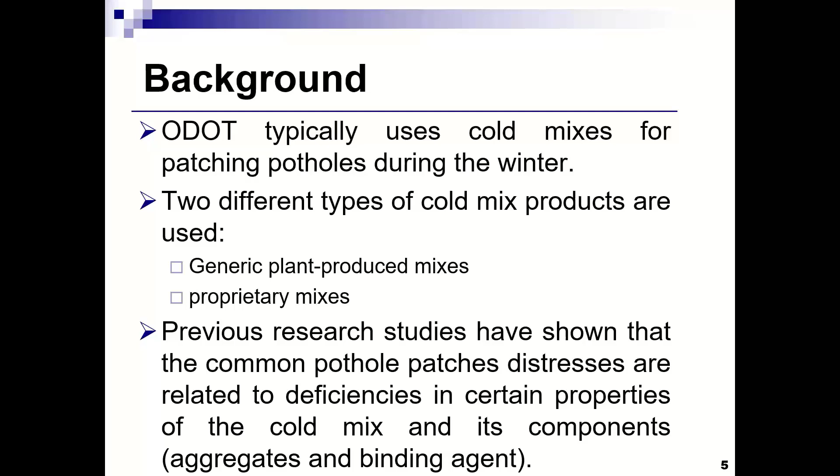There have been several research studies indicating that the performance of patches and their longevity is related to the properties of the cold mix. However, these studies did not really identify what properties can be used to examine the performance of those materials and ensure the longevity and performance of installed patches.

ODOT, and I would say the majority of transportation agencies, whether DOTs or local public agencies, currently do not have a standard specification for cold mix. Basically, they do not have a measure to ensure the quality of cold mix, whether it is generic plant-produced cold mix, or proprietary and included in ODOT's approved list of materials.

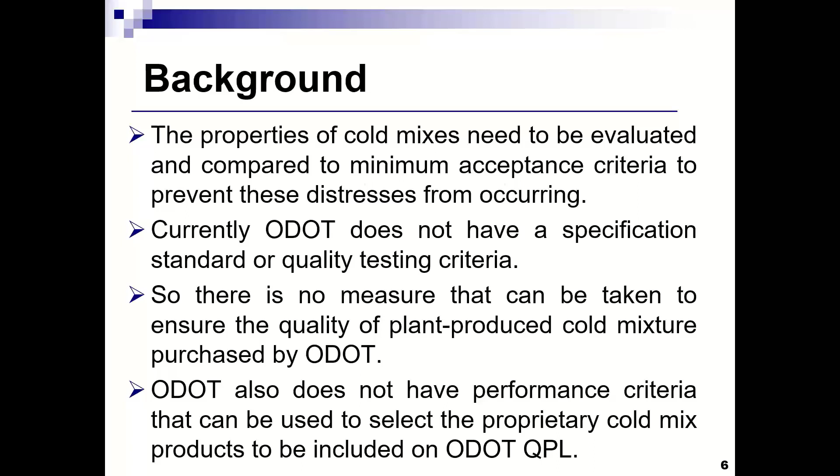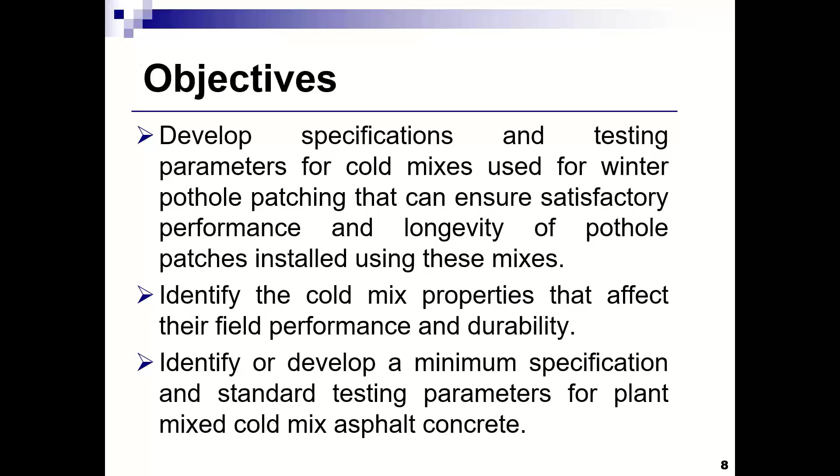As a result, there was a need to develop specifications to ensure the performance of patches. So the objectives—starting with the ultimate goal of this project—were really to develop specifications for cold mix specifically used for winter pothole patching, to ensure satisfactory performance and longevity of patches installed using those mixes. To achieve this goal, we had two main objectives: identifying the properties that affect performance and durability, and identifying the threshold limits for those properties that can be used as acceptance criteria in the specification.

The project had multiple tasks. We started with identifying the current state of practice, identifying the cold mix materials used by ODOT, and determining ODOT's experience with those materials. We also did a literature review as well as a national survey to determine if there was any standard specification used for cold mix. We found that, at least at the time this survey was conducted, there was no standard specification for cold mix.

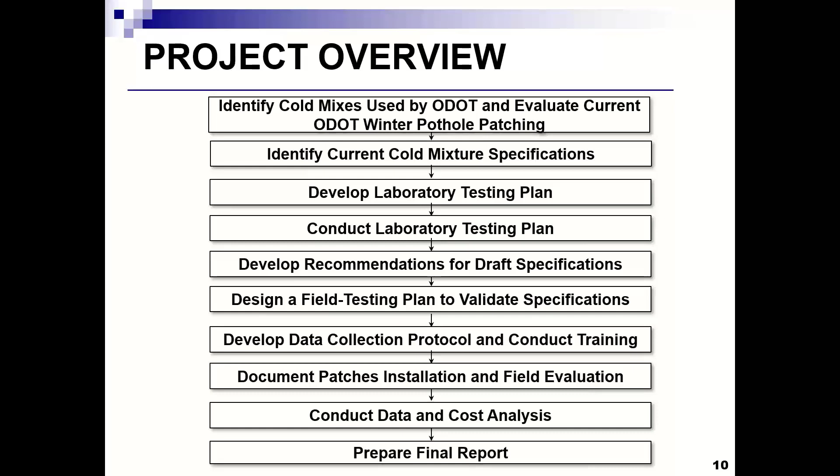Based on that, we developed a laboratory testing program, which I'll talk about in a moment. That led to developing a draft specification, which was then validated through a field testing program. As I said, we had two phases. In phase one, the focus was on lab testing, where we collected different cold mix materials and their components—the binding agent and the aggregate.

We basically developed a mixing criteria and aging and curing protocol to simulate what we have in the field. Then we did a comprehensive lab testing program to determine the properties able to detect the effects of the binder and aggregate. We also had a previous study using cold mix materials that helped us identify the limits needed to be set based on our lab testing results.

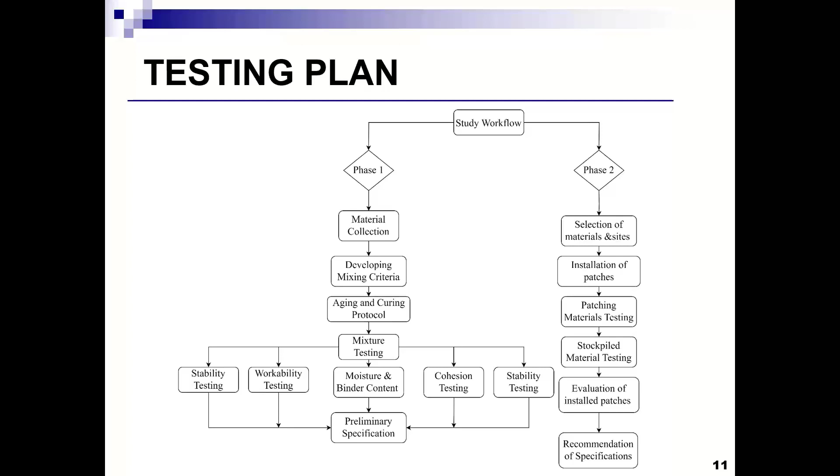In phase two, we used different cold mix materials, both generic and proprietary, as well as bulk and bagged. We used them to install patches in different locations within Ohio, focusing on different climates. We selected sites in the Northeast as well as the Southwest, and based on that, we finalized our recommendation and specification.

So phase one was the laboratory testing program. In phase one, we selected 8 different aggregates - 5 limestone and 3 gravel. All of those aggregate materials had been used in producing cold mix, and that's one of the reasons why we selected them.

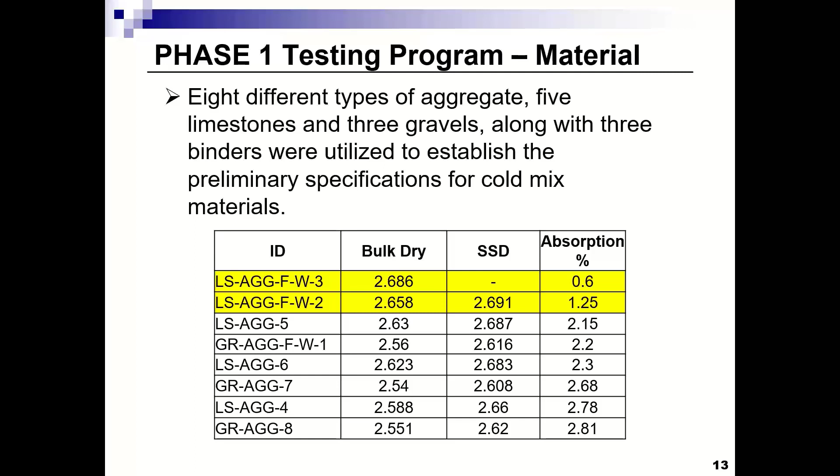We tried to make sure we had materials with different properties, specifically low and high absorption. We also looked at the percentage of fines, or passing 200, and you can see we have a range here.

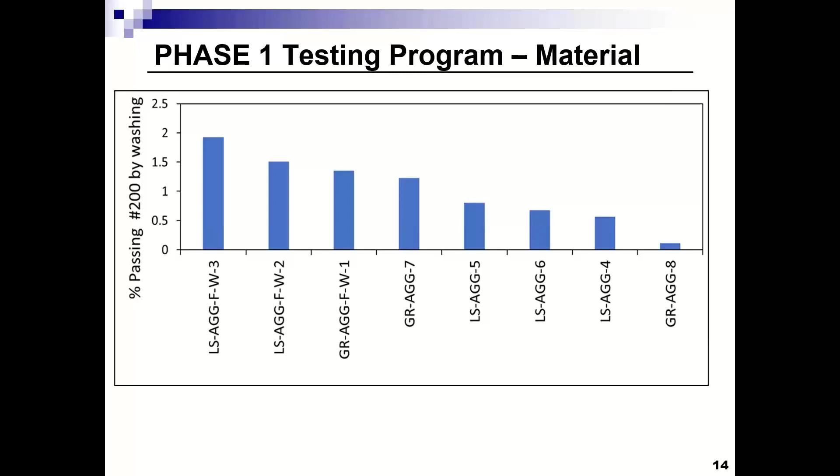We selected 3 different binding agents. Those binding agents are used in producing cold mix in Ohio as well as outside Ohio, and we conducted different tests to characterize the properties of the binding agent.

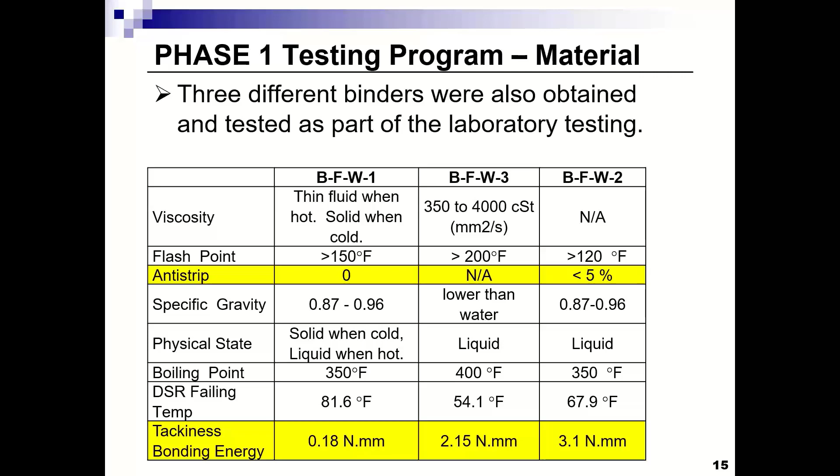One of the things we looked into was conducting the dynamic shear test, as well as a new test that we adopted - the tackiness bonding energy test - which helps us determine the adhesive properties of the binder.

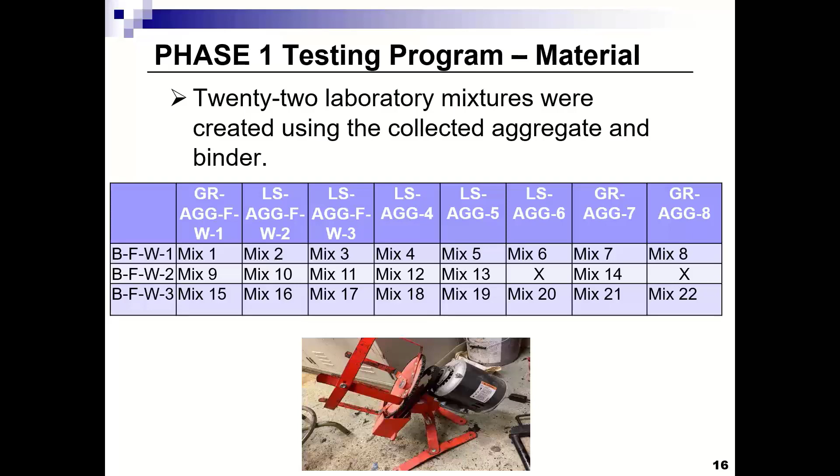We did different aggregate-binder combinations. We had 8 aggregates and 3 binders. I would say we tried to have a full factorial, but we were short by 2 mixes - we had an overall 22 mixes that were prepared and tested.

The tests we have looked at properties we thought would impact performance, starting with cohesion. We know the cohesion of the mix will affect that, so we had a torque test that was actually developed as part of another ODOT project.

We also looked into the stability of the material - the Ideal CT as well as the Hamburg loaded wheel test. The stability tells us more about strength properties as well as ductility, so both are within that.

And then we have the moisture susceptibility as well as the stripping potential there, and we used the boiling test for that.

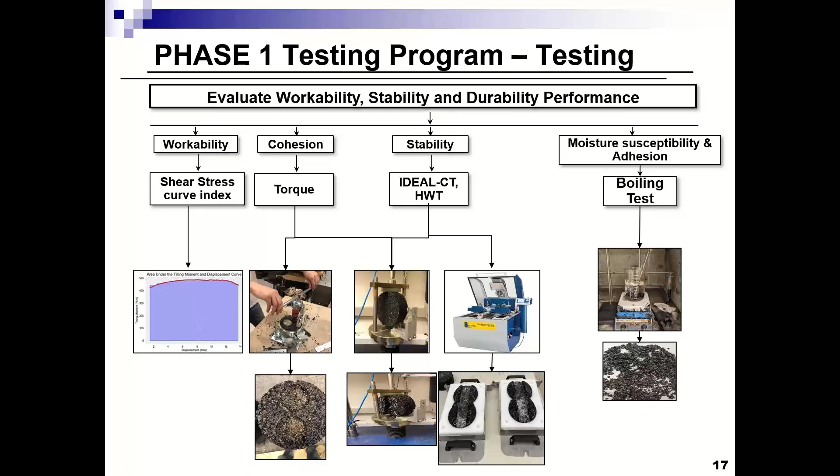We also looked into workability, and we evaluated different tests. The test we found to be related to the observed workability was really looking at the curve - the tilting moment curve coming from the Superpave gyratory. So basically compacting a Superpave gyratory at low temperature and looking at the area under the tilting moment displacement curve, which is shown here. This area, we are calling it the shear stress curve index.

For this, because we're looking at the intermediate to low temperature, this is important, and as we will talk about it in a moment, it can also be related to the rutting potential of the cold mix. So this ITS - the higher the number, the better the strength.

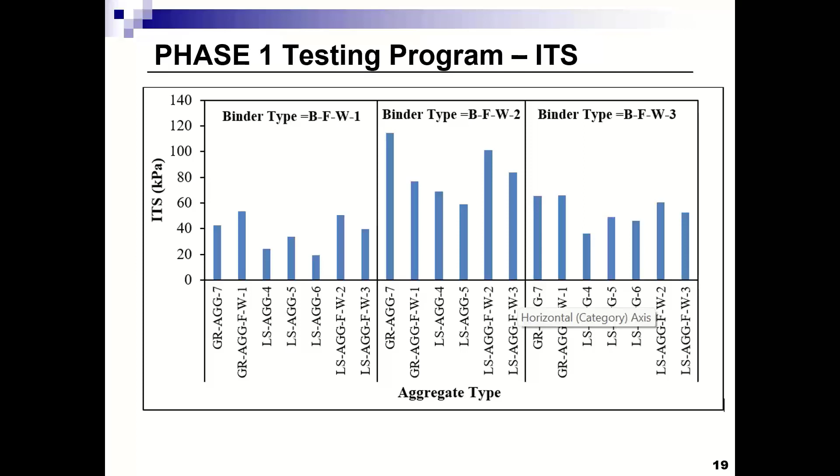The other parameter we looked into was the CTI, the cracking tolerance index. It's a parameter currently used to evaluate hot mix asphalt, and it tells us about the cracking potential - I would say the ductility, to a certain degree, of your material and its tolerance to cracking.

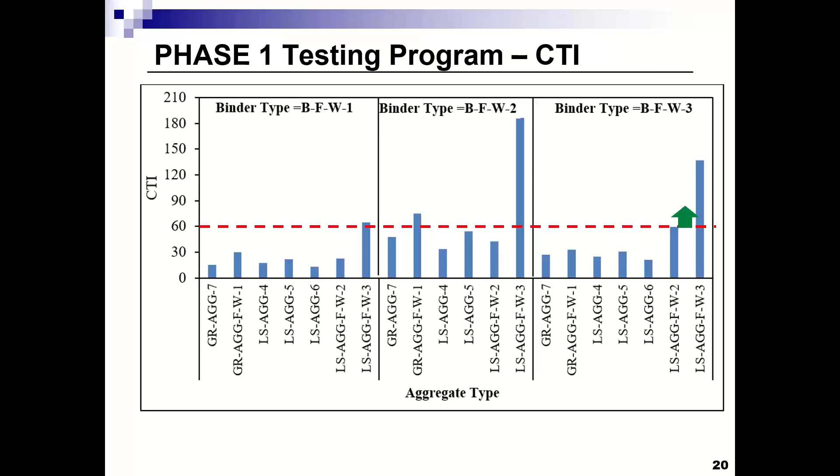One important thing that I would say, that again this was later on verified, is that the CTI seems to be affected by both the aggregate, and it also takes into consideration the binder. So it is a parameter that was able to differentiate between, or detect the effects of, changing the binder type.

The other parameter or test that we had is the boiling test, and the main thing is the percentage of material showing stripping. I would say it's a very easy test, but we found that the stripping parameter seems to be also able to distinguish the effect of the binder and the aggregate on the performance.

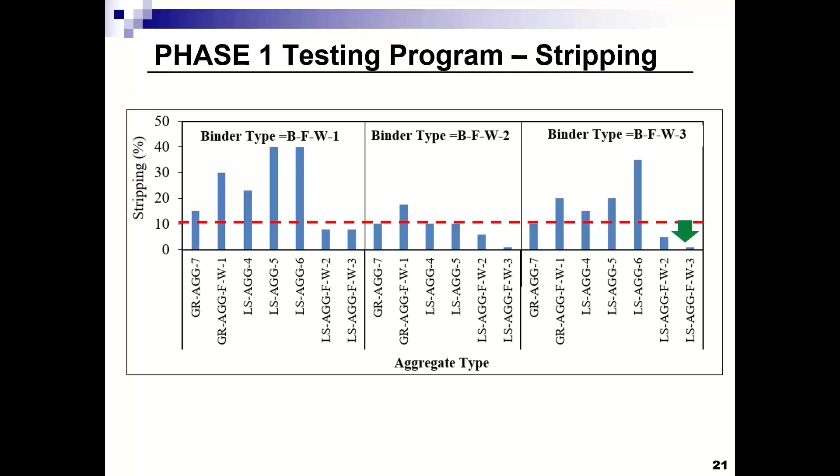Again, based on field data, what we observed is anything that is less than 10%, which is also according to the standard for this test, the boiling test, the 10% is the maximum allowed stripping. So we used that number based on the field data as well, and anything below 10% is acceptable or has acceptable performance.

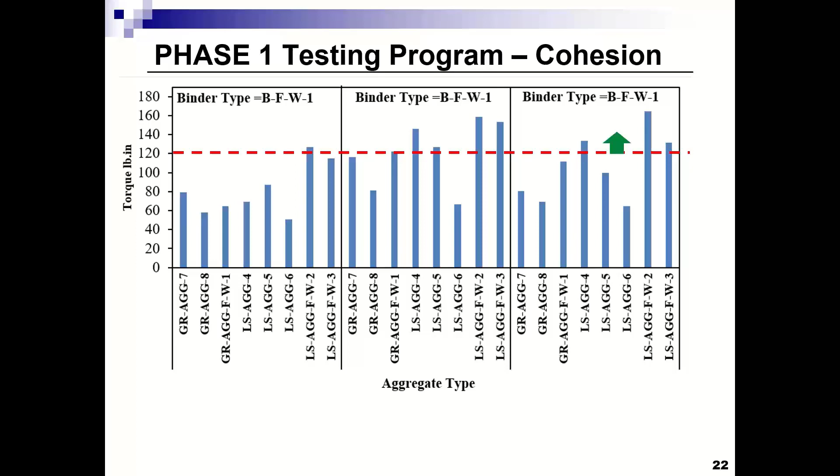...we have set 120 torque pound-inches basically as the minimum, so anything above that would be acceptable. We changed that later on, but this is basically based on the lab testing.

The other important thing was the rutting, which is correlated really with the dishing. Dishing can be a big problem for potholes. So you can have a material that has good cohesion, good durability, but it does not have enough strength, and as a result you will have dishing in the patch.

So based on what we have seen, we looked at materials that have shown, based on field data, high dishing, and we tried to look at the parameters - what is the minimum number of wheel passes that will enable us to ensure that we will not have a dishing? The number was around 2,500.

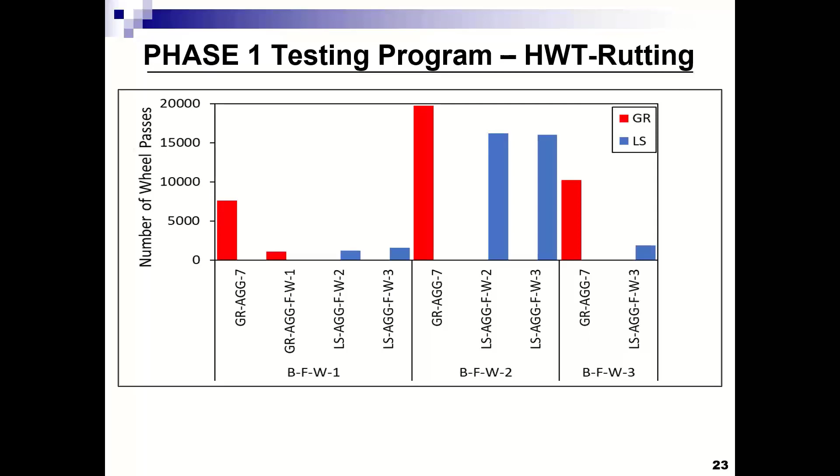One thing that we noticed is that the Hamburg loaded wheel is a test that might not be readily available at the current time with a lot of contractors, as compared, for example, to the IDT. So what we have done is looked at the correlation.

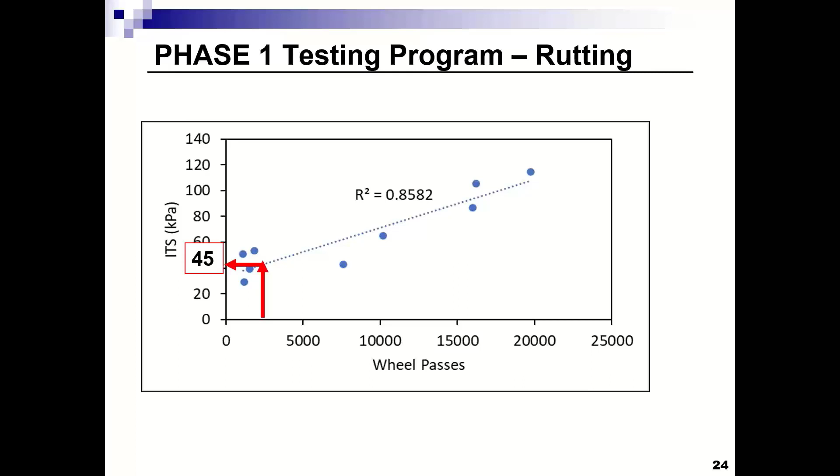This is the ITS done at room temperature, and the Hamburg loaded wheel in this study was conducted at room temperature because we are testing cold mix materials. We found a very good correlation, and from there we found that the 2,500 is equivalent to an ITS of 45 kPa, and this is what we selected as the minimum criteria to ensure that rutting will not happen.

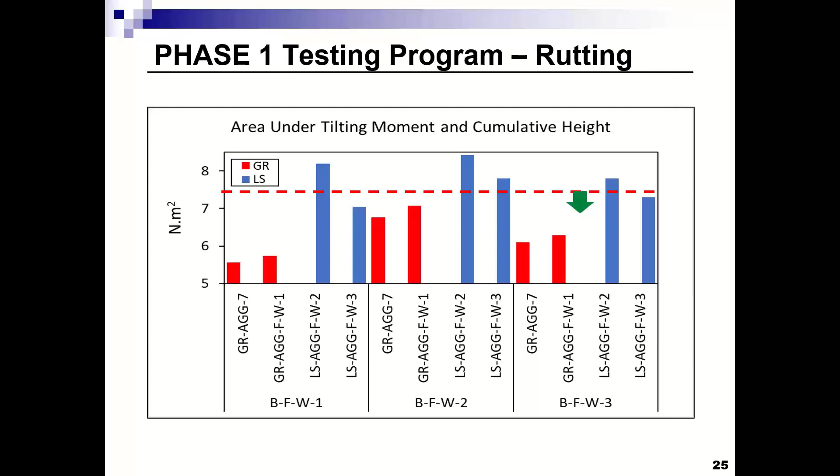The workability, we looked at the material and how workable it is. There was one material that was hard to compact and, based on observation, also hard to work with. Based on what we found, any material that has a shear index lower than 7.5 should have acceptable workability and should be workable in the field.

Also lab testing, as I will be talking about in a moment. So we did 231 patches. We did the installation of the pothole patches in different sites in northeast and southwest Ohio.

The patching itself was done by ODOT, Lorain and Hamilton County, in District 3 and District 8 respectively. You can see that we used 12 different materials, as shown there.

We looked into having a proprietary material as well as a generic, both bagged and bulk. We tried to have a minimum of at least 5 patches, but in the majority had at least 10 patches so that we are able to have conclusive results.

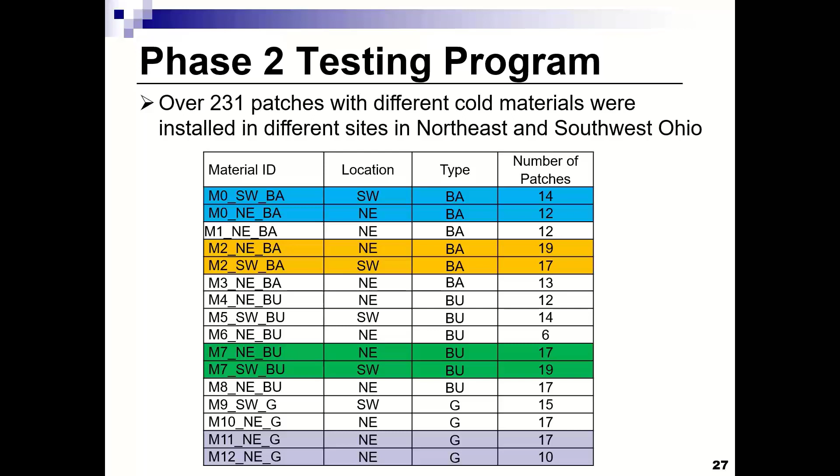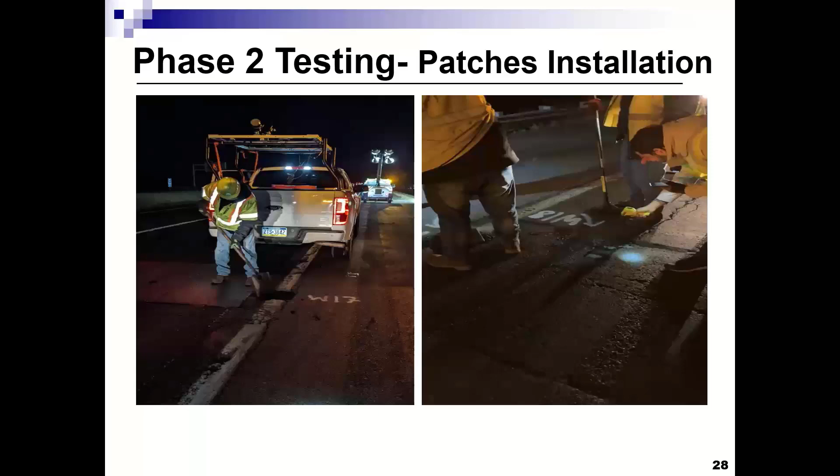Again, most of the work, because it was on an interstate, we basically had to do it during the night. We used a system that was developed to take initial pictures and location of each patch, and each patch was labeled.

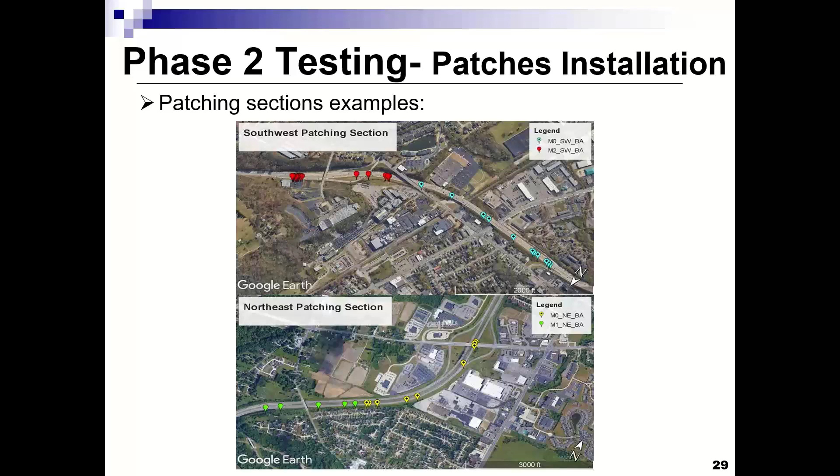This is based on that system, which enabled us to take pictures at high resolution and high frequency while driving at highway speeds. It enabled us to take images of the patches that are georeferenced, so we're able to get the exact location. We had a high accuracy GPS in there.

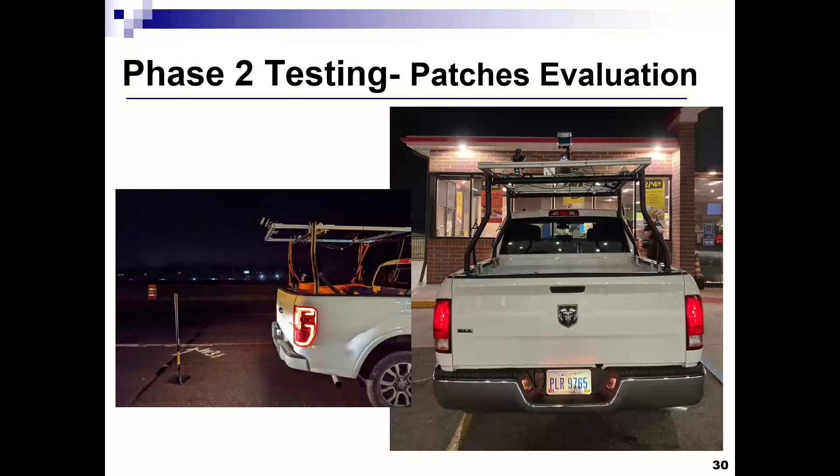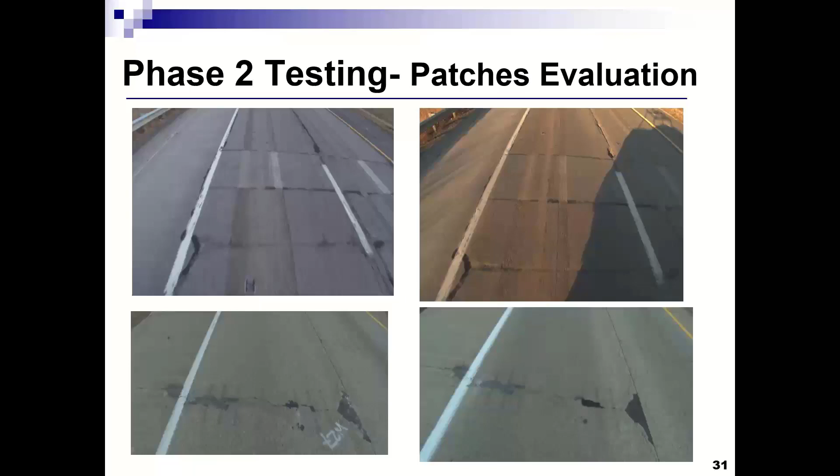This is a picture of the system mounted on the pickup truck. Those are images taken before and after. What we've done is take images directly after installation, then did an evaluation, basically taking images of those patches the first week, first month, second month, and then every 2 months for up to 1 year.

One of the things we did was collect samples of the materials used in the patching. We obtained those materials and tested them. For one of the materials, we looked at the material properties with time by sampling the material after 4 months and 8 months, and that material was also tested.

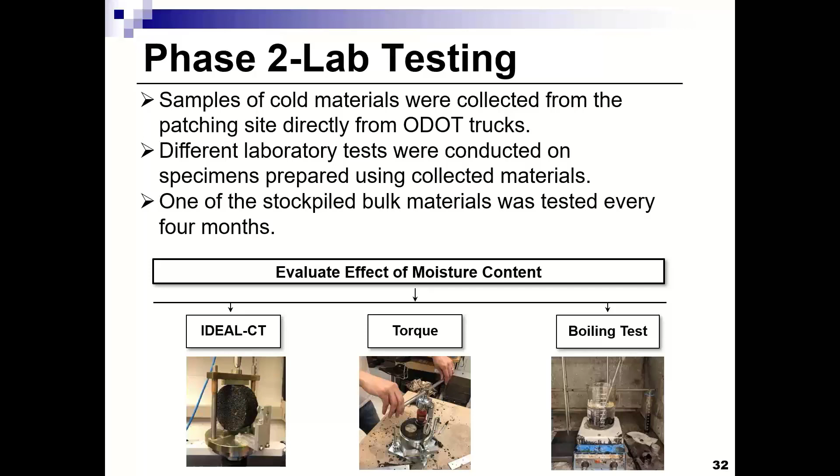The main tests we conducted are performance related, which is the ideal CT torque as well as the boiling test. Here I'm showing the ITS, and one thing we've seen is that in general the materials used in this study had acceptable criteria, more than 45 ITS. Some materials had a very high strength, and that high strength might not necessarily indicate better performance - it means it's a stiffer material that can resist dishing more.

Within the CTI, we had materials that did not perform well. One material that performed poorly, which we'll see later, is M12, an aged material. That aged material seems to have failed, not meeting the criteria of 60 that we have.

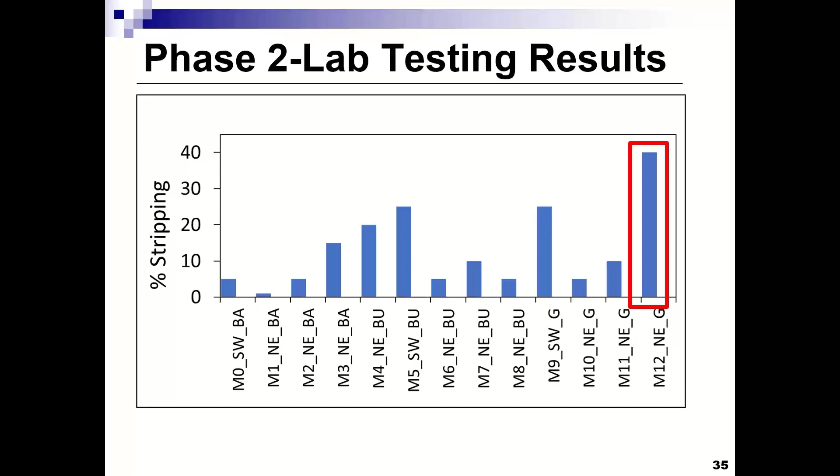The stripping is one of those parameters that was really a good indicator of performance. That material that failed - let's focus on that material, because the other materials actually performed generally well, at least within the evaluation period. But M12 actually failed within a month of installation, and it had very high stripping potential, which indicates that stripping is a parameter there.

One of the things we looked into is how the different properties change with time, and the property that changed significantly is the percent stripping. This material was good initially, less than 10, but after 4 months it was more than 20, and after 8 months it was more than 40.

We had actually done the 12 months, and it was still above that 40%. So one of the things we looked into was the data collected in the field to determine the survival life, mainly because a lot of the patches did not really fail, or some did not fail, and we needed to do a survival life analysis to determine that.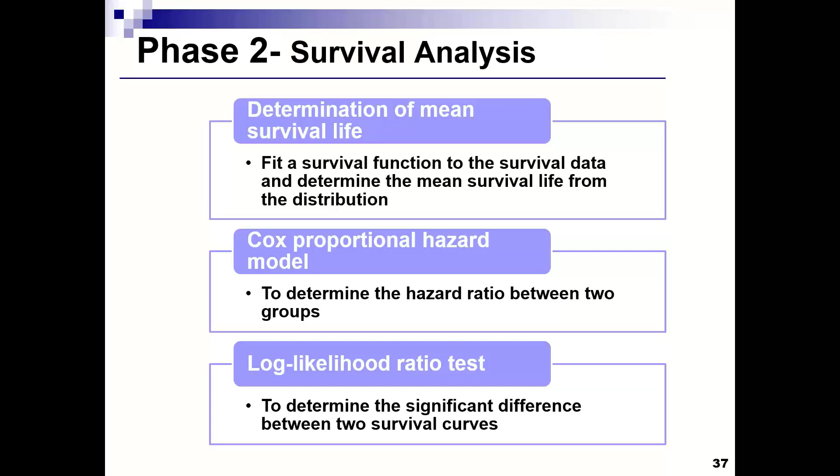We also did the Cox proportional hazard model. The hazard ratio I'll be showing tells us the higher it is, as compared to 1, this means there's more potential for failure. We also had the likelihood ratio test.

From those results - and we have a lot of results there - one thing I'd say is from the hazard ratio, just to remind you, if we have a hazard ratio above 1, this means that parameter or material is affecting it adversely, or will cause the patch to fail. Using that M12 aged material, it seems it had the highest, and its effect is significant at 95% confidence level.

There is another material, M3, used in the Northeast. The other important thing is just using a material in the Northeast as compared to the Southwest - the main difference, since the locations had similar traffic, is really the weather condition, most importantly the number of freezing days. As you can see, having the same material but in a different location - if it's in the Southwest, it will lead to a lower probability of failure.

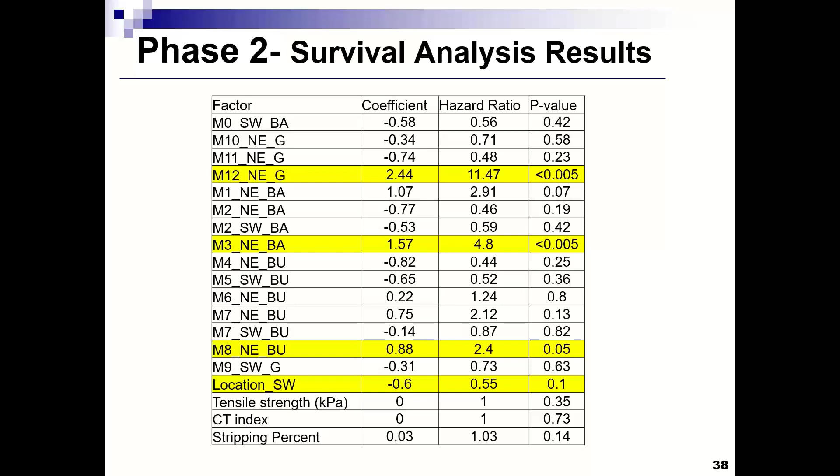That is general for all materials, but we have found that certain materials are more prone to the weather conditions compared to others. This is the survival life, and one of the things we have seen is the probability of survival.

So basically if you want the probability of failure, you subtract. We had materials M11 and M12, both produced at the same plant. The difference is one has been used a year after it was produced, so it's an aged material. It was produced, used in the field, and then leftovers were used in the second season.

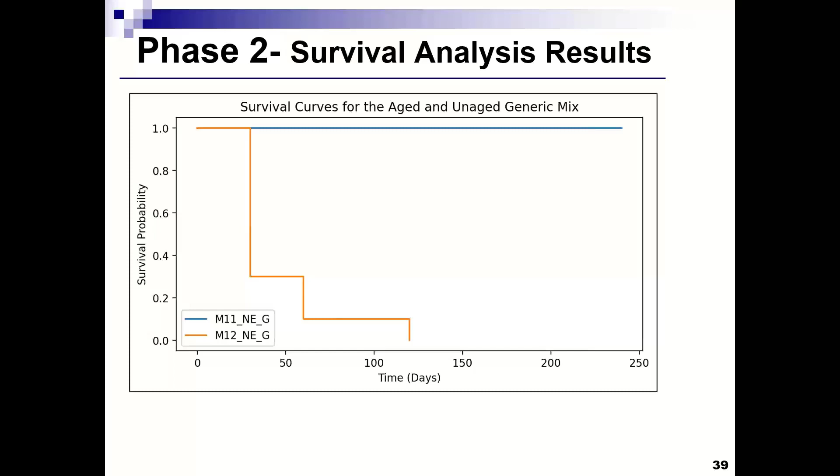What we found from the survival life is that its probability of survival is low, indicating that within a month or so it will fail. The average mean for that was actually less than a month.

One of the things we looked into is the same materials but at different locations. What we observed is some materials, like M2, performed really well in the southwest within that weather, but in the northeast the probability of survival decreased.

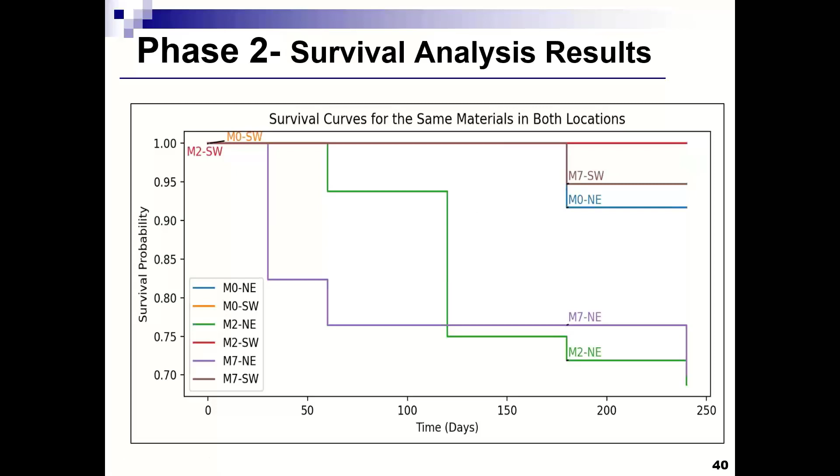Applied to that, M7 and M0 are different cold mix materials designated that way because we needed to not provide information about the producer. What we have is that some materials, like M0, did not show a significant difference in survival between the southwest and the northeast compared to the other two materials.

Within the northeast, we have seen some materials, including M12 and specifically M3, fail, with a lower probability of survival compared to the others. But in general, the cold mix used in the field study performed relatively well.

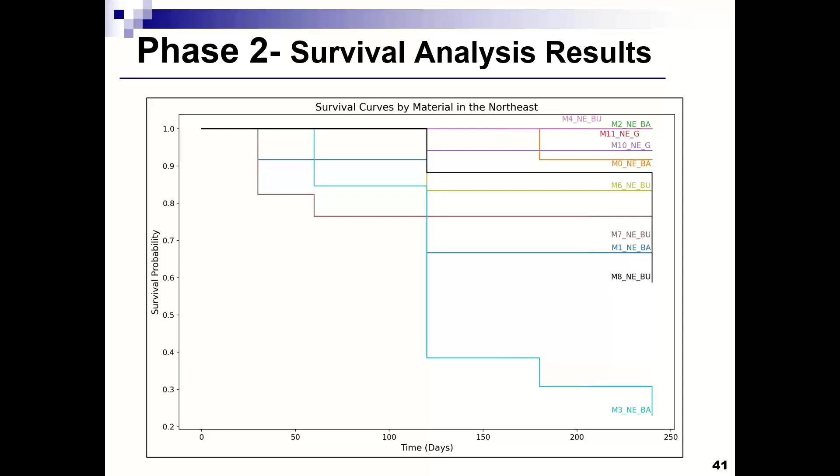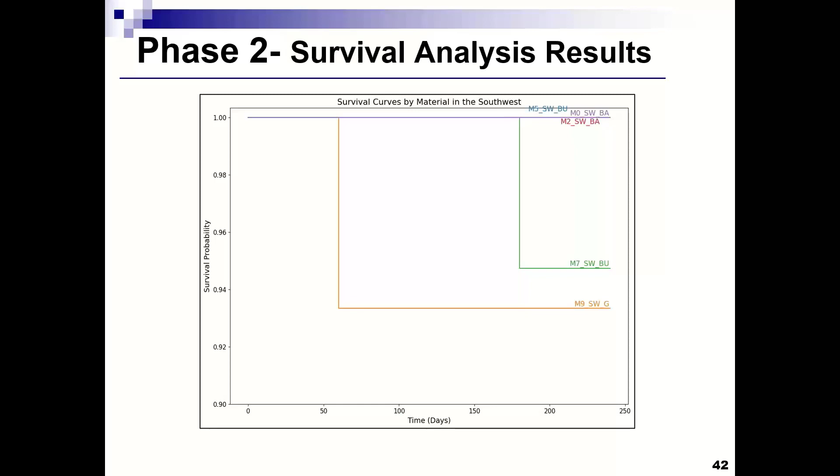In general, the patches that were installed performed well. In the southwest, the materials we used had good survival, or much better survival rates. In most of them, the survival rate within the period of evaluation was really more than 90%.

We did a cost analysis focused on materials meeting the specification. We tried to use a material meeting the specification at an average cost, then a material much more expensive than the others, still meeting the specification. And then we had a material the same cost as the first, but not meeting the specification.

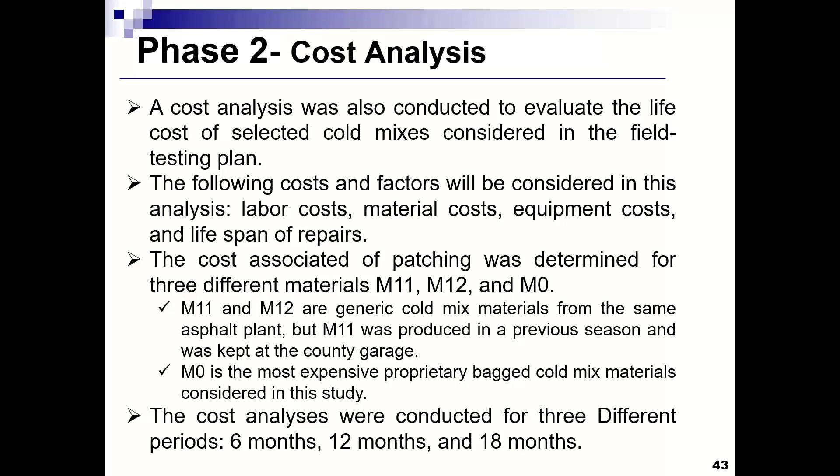We did different analyses at 6, 12, and 18 months. One of the most important things we found is that using a material that is failing and not meeting the specification leads to almost doubling the cost for a patch. The main reason is that if a cold mix is not meeting the specification and is not performing well, it fails prematurely within a month or two, causing repatching.

Looking at the data, the most expensive part of patching is really the labor rather than the material itself. This means that even using the most expensive material, over a 12-month span we found that a material with much lower initial cost but not meeting specification will lead to higher cost for patching. So those materials should be avoided, because they can increase the cost of patching significantly.

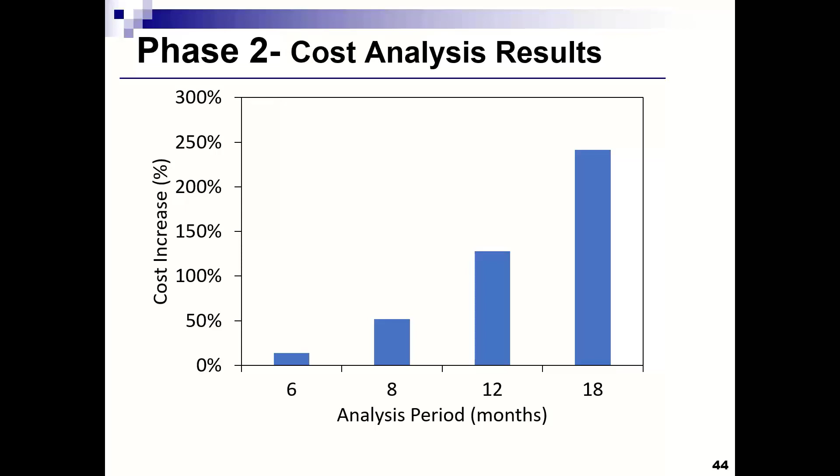In conclusion, we have seen that using aggregates with low absorption leads to a material less susceptible to moisture damage compared to those with higher absorption, resulting in a more durable material.

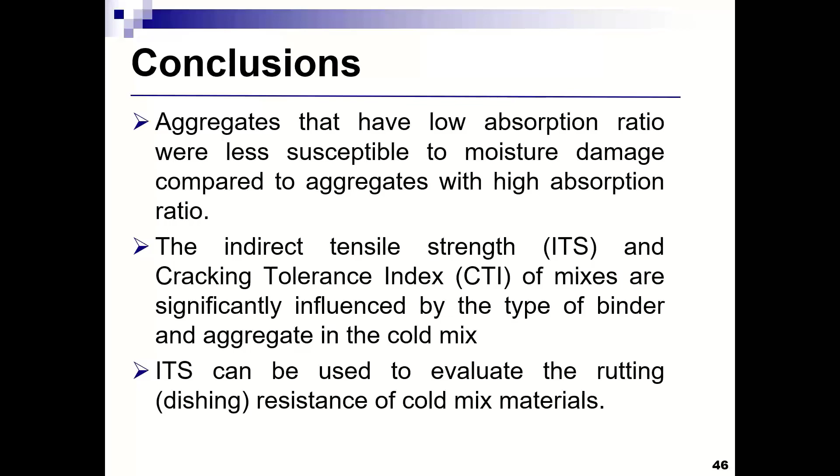One important thing is that the CTI and the ITS, coming from the ideal CT, are both influenced by the binder and the aggregate. The CTI seems to detect differences between the binders, and the ITS seems to be a good indicator of rutting potential, and can be used to evaluate the cold mix in terms of rutting.

The boiling test was used, and the stripping percent coming from the boiling test seems to be a good indicator of durability and performance, based on lab testing as well as verified in the field.

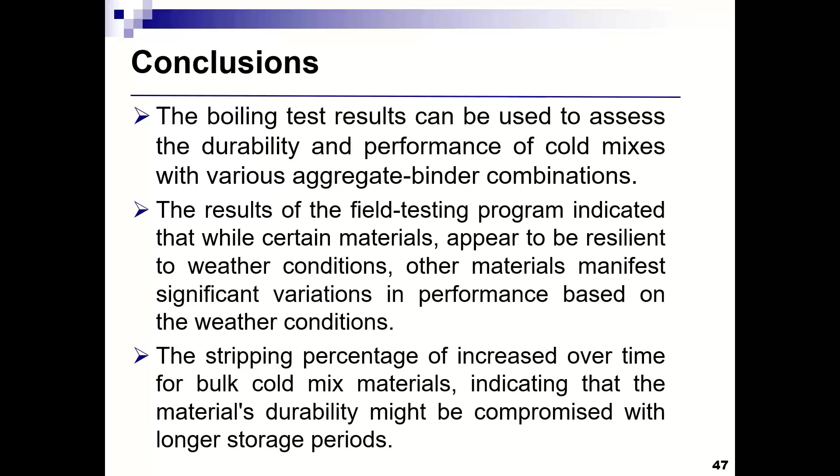One of the things we have seen is that some materials seem more resilient to weather conditions, while other materials are more prone to weather conditions. That means the same material might perform differently within different regions of Ohio. The other important thing is the stripping potential. The results show that material properties and durability will change with time, and I'm talking about bulk cold mix material stored in a stockpile. Therefore, the material properties need to be checked with time.

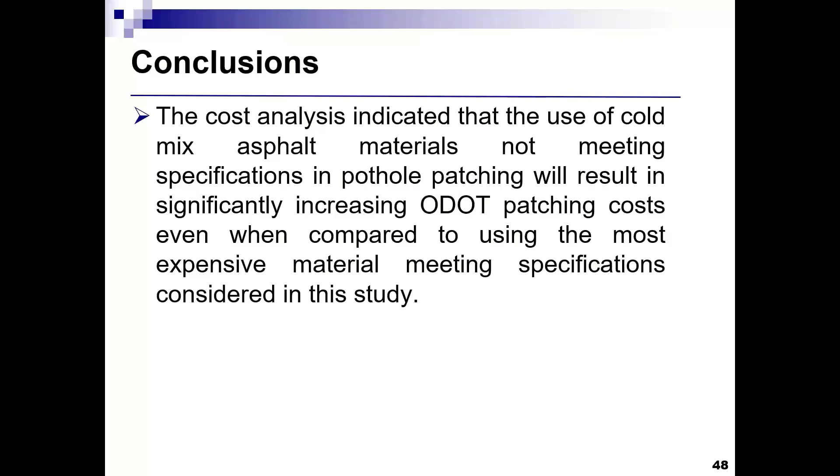The cost analysis indicated that materials not meeting the specification can increase the cost of patching overall, and it can lead to higher costs as compared to using the most expensive material.

The main recommendation is basically our recommended specification with different tests. One of the most important things is that each test captures part of the performance, so we had to include multiple properties. You can have a material with a very high ITS value but a low CTI and ideal CT, which means it will fail. So combined, I'd say the first four parameters are good indicators of field performance, and specifically the boiling test can indicate both performance and durability of the material.

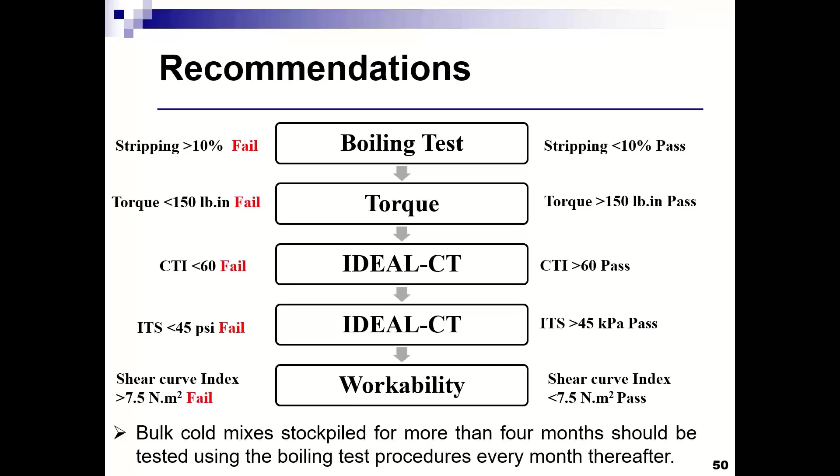We also recommend that if a cold mix is stored more than four months, possibly more than one season, it needs to be tested after four months using the boiling test. We recommend that if it shows more than 10% stripping, that material should not be used in the field, because patches installed using that material may prematurely fail. Thank you for attending this presentation, and if you have any questions, please let me know.